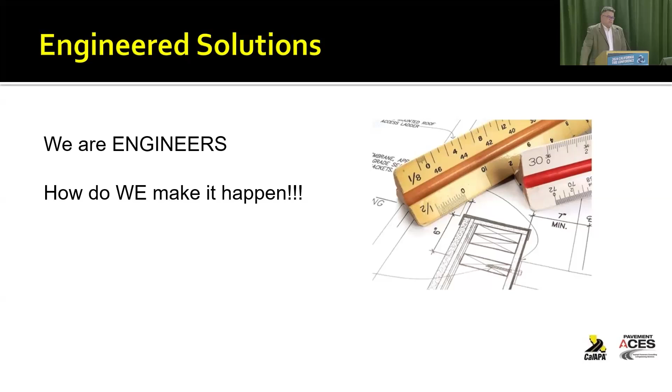And we know we can do this because, for many of us, we're engineers. We are provided an opportunity to fix something, and we figure out a way to do it. Utilizing recycled materials in asphalt pavements, we can do it and we can show it.

When we look at the state of California and the pavements that we're dealing with, we first look at our population. We look at the numbers of vehicles registered, how many drivers we have, how far and how long people are in their vehicles. They're pretty staggering when you compare this to the rest of the country.

That's a lot of people in cars driving our roads every day, and we have a lot of roads. Caltrans manages about 15,000 centerline miles, about 13% of all the roads in California, which comes out to about 52,000 lane miles.

But when you look at us as a state, we're just under 400,000 lane miles that we have to manage, maintain, and repair. That's number 2 in the country behind Texas, at about just under 700,000 lane miles. Then you have a state like Hawaii, with just under 10,000 lane miles.

So you can see that in California, we've got a lot of what we in the asphalt industry like to call opportunities in front of us.

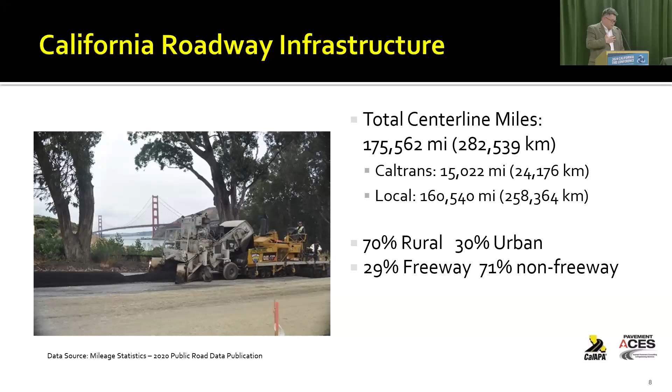When we look at our industry, we do a lot of work to help build, maintain, and reconstruct our pavements. A lot of tons of mix go down in this state, and probably half of that is private work, the other half public. Caltrans is 52,000 lane miles, cities about 181,000 lane miles, and counties about 150,000 lane miles, more or less. All that private work is maybe residential, parking lots, that type of paving. So that gives you an idea of what we're dealing with here in California.

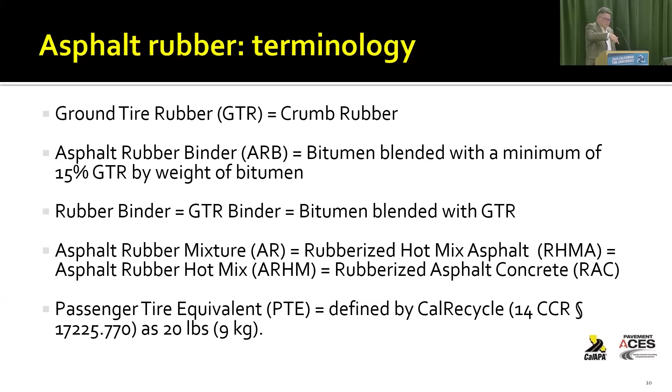With terminology, everyone calls it something different depending on the city, state, or country. But in general we coalesce around some concepts regarding asphalt rubber. We talk about having a minimum of 15% ground tire rubber in the mixture, 15% in the binder, which is in the mix. We also have other types of rubber binders and rubber additives that we deal with.

So how do we deal with it? We look at how to improve our pavements and take advantage of the rubber particles to help improve the materials we're using. We see that in our mix designs, our pavement designs, how we actually build it. We have to make some tweaks on all of that, but the key thing is that we're able to maximize the use of those ground tire rubber particles and take full advantage of their performance benefits.

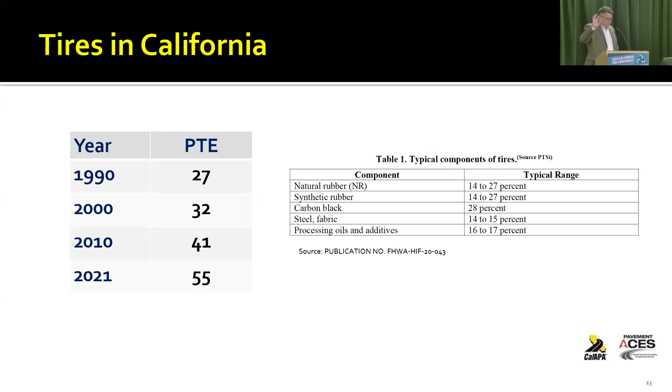Overall, we have a lot of tires here in California that we have to deal with, and it's been growing year by year. Why are we doing this with tires? Back in the 90s, we had huge stockpiles of tires in this state, and they would catch fire. We had 3 major fires in the 90s.

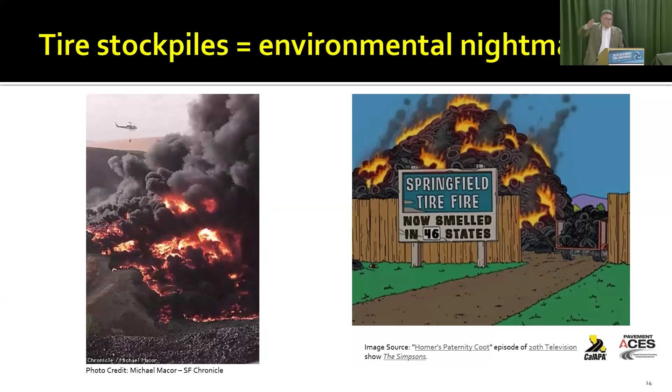What we don't often talk about is this - we've been talking about the coho, but this was a big one. Anyone who lived in California remembers the black smoke coming out of these stockpile fires, and they wouldn't go away. This is one of those art-imitates-life situations, where you had regular occurrences on our favorite cartoon show, The Simpsons, referencing the burning stockpile. This was a running gag that went on for a good decade in those shows.

We had to do something about it. That's really where we start to look at the commitment by our owners, by the agencies, regarding how we're going to manage these tires. How are we going to get rid of them? What other ways do we have?

It led to 2 ways that our owners in this state committed to use tires. One was through a straight mandate, where the legislature said Caltrans, you will use ground tire rubber in your pavements. We also had CalRecycle, who came in with more of a carrot-in-front-of-local-agencies approach to use it. As a result, we've seen a significant increase in rubber. That doesn't mean there's not a lot of space to grow, but we have seen this steady increase in rubber usage.

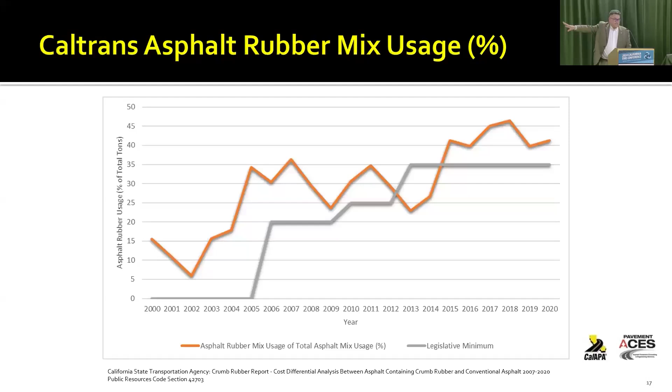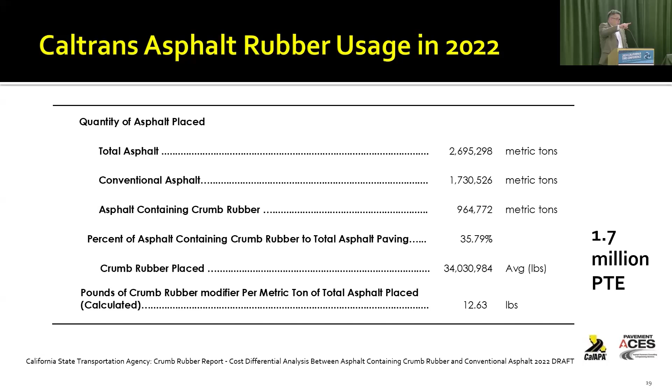Here's for California - we start to see the actual comparison of asphalt rubber to conventional mix usage. I'm moving through these slides fast, but you can download them off the website, so please do that. This just gives you an idea - we're talking about 1.7 million passenger tire equivalents that Caltrans used just in '22 alone.

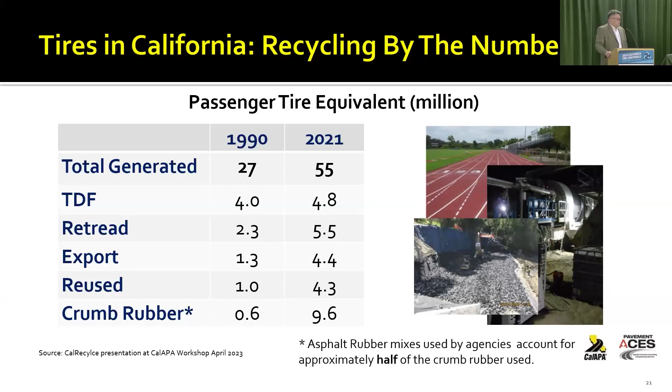And then also with the CalRecycle grant program, we're seeing another 2.6 million passenger tire equivalents that are being used each year because of their grant program. But that doesn't account for all of the other possible uses of it within our public works. So we're starting to see more increase in how we use it in our public works infrastructure projects.

So how do we do it? Why do we do it? It's because of the performance. That's really what it comes down to. This material started back in the 60s and 70s and has moved over to the present time where we have seen its use. It's been placed around on the streets in Southern California, in Arizona, all across the country. And the common thing that comes out of all of this is we're seeing something better than when we didn't have it in there.

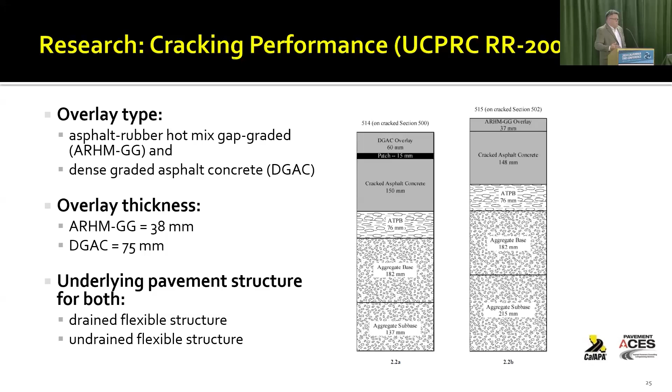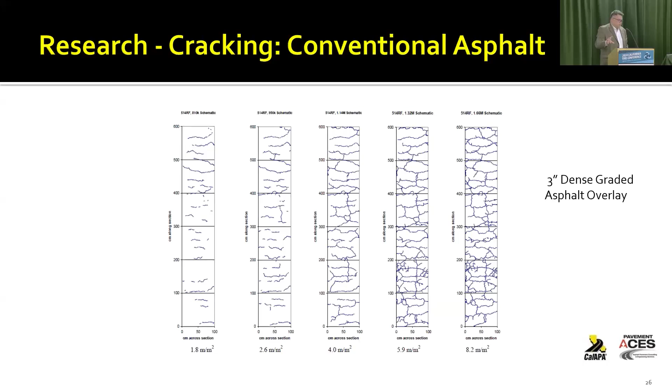Great research has come out from the UC Pavement Research Center. We have our director for the UCPRC, John Harvey, sitting right over there, going way back to 2000. Remember, we're talking about just after the fires, where we start looking at the performance of asphalt rubber compared to conventional mixes. We look at heavy vehicle simulator testing at the test track at UCPRC, where we see the cracking pattern for our conventional mix. Then we take asphalt rubber and do it at only half the thickness, and it's actually even at half the thickness, better than conventional mix at a full thickness.

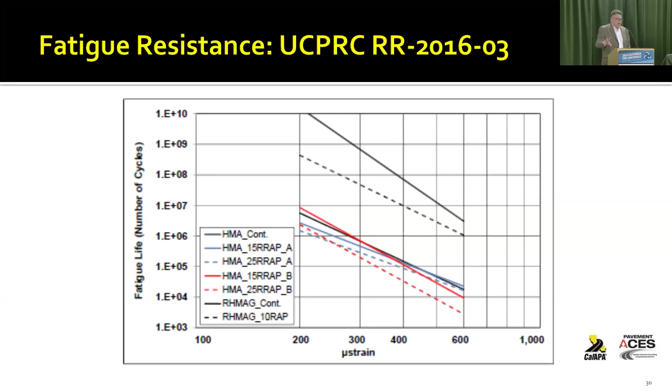So we're starting to not just see it in the field, we're now at a point where our research is starting to quantify it — quantifying the improvement to crack resistance of these mixes. We see it in more performance testing that we're moving to in our industry, for fatigue resistance, how it's much better than what we would typically see with the conventional mix. And when we're talking fatigue, this is about cracking — where the pavement isn't cracking, or is taking longer to start cracking progression to failure.

So continuing with research, Angel's going to come up here in a little bit and he'll go into a lot more detail on it.

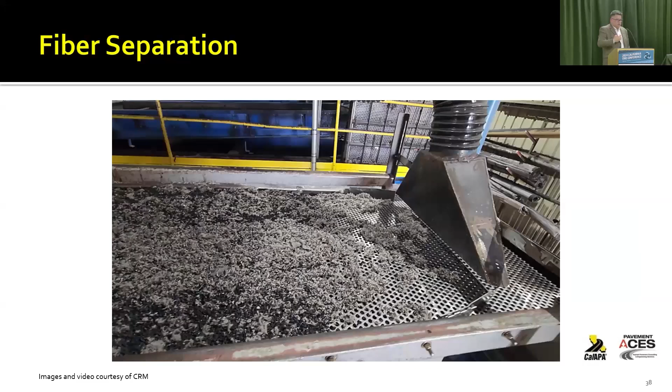Tire processing — how do we take this tire and make it into something we can use? Our friends here at CRM have done a great job in showing the industry and all of our agency partners how we do that: how we take a tire, grind it up, break it down into smaller parts, take out the metal, take out the fiber. We talked about that earlier in regards to the effects fiber can have on our pavements, or any recycling use in general. And then we go ahead and put it out into different sizes.

We have two primary processes, and when we talk about innovation in the asphalt rubber space, it's about looking at wet process innovation. We're currently using asphalt rubber where we take it really hot and mix the rubber in it. We also have something where it's terminal blended — this is where we start to look at the devulcanized rubber and utilize that to modify our binders and our mixes.

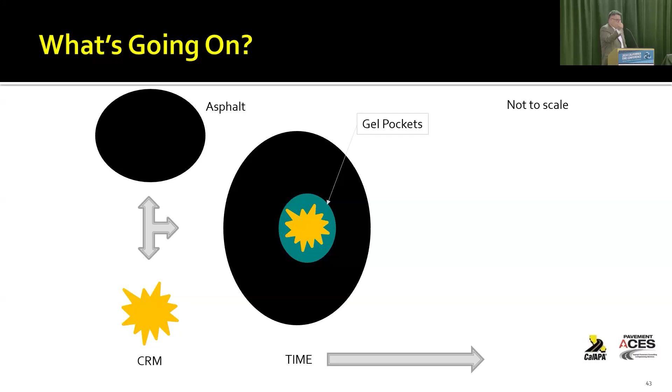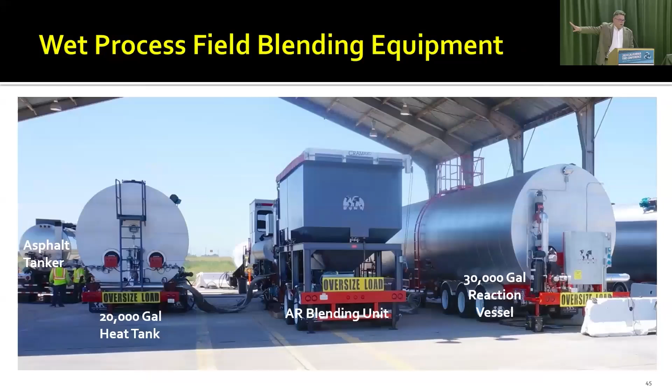So what are we actually doing? We're finding a way to make that rubber particle so that when we hold it, we can rub it in our fingers like a grain of sand. Doesn't feel like it can do it, but we can go ahead and, in our process, meld that with our asphalt to take advantage of its resilient properties. We do that in heavy equipment at hot plants where we're actually doing this on a regular basis during our mix production.

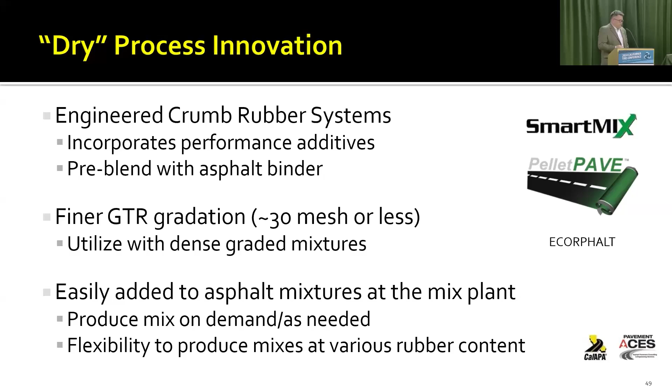We can take that binder that we've blended in the field, or maybe the binder that's been blended with the crumb rubber at a terminal, and add it to our mixes. So we have more and more new technologies on how to improve getting the crumb rubber into our mixes. We also have our dry process, where this allows us to have different types of rubber pellets that we can add at the plant. So this is where innovation comes in — it's not about whether it works, we know it works. It's about how we can economize and make it more efficient to get that crumb rubber into our mixes on an everyday basis. And then we evaluate it with our life cycle cost analysis, similar to what we saw with LCA for local agencies.

The City and County Pavement Improvement Center, which John Harvey directs, provides a lot of insight and training in regards to how agencies can use an LCCA, the procedure to evaluate the different types of strategies to maintain and reconstruct pavements and make sure that they're making the best decision for our public utilities.

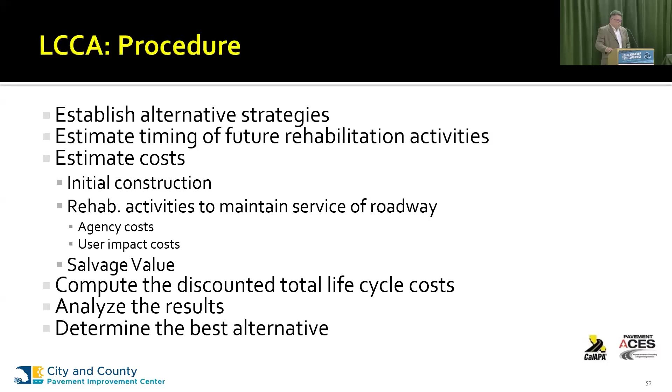Looking at the performance of the pavement, we take the performance information we have from our research and from our field, we utilize that to choose the best treatment for our roads. Then we can compare them and make sure this is cost effective. And that's one thing we definitely see with asphalt rubber is that when we do all of those calculations, we have a cost effective solution.

We have different available LCCA apps to do this type of evaluation, whether it's through CCPIC, the Pavement Preservation Center at Chico, Road Resource, or FHWA - all have great information on how to utilize these LCCAs.

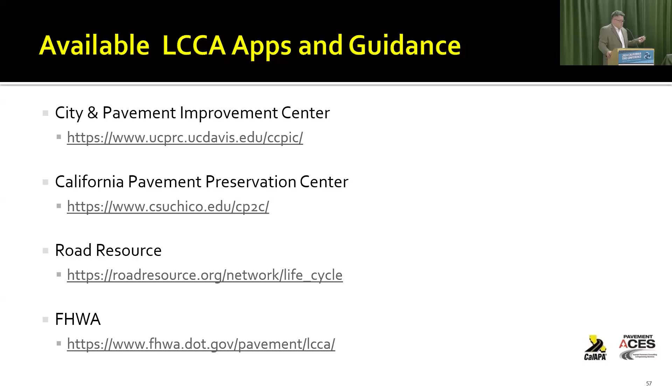So with that, I'm going to bring up Scott. He's going to talk about using pavement preservation treatments that incorporate ground tire rubber. Scott?

As we were preparing for this presentation, I looked at Brandon's 55 slides and I said, I'm going to have about 30 seconds. And he said, no, I'm going to blow right through that. And I said, well, okay, I'll find out when we get to the end. Congratulations, Brandon, you moved rapidly through that. I do want to say I appreciate it - I expected 4 people left in the room, 3 of them to check up on what I was doing, and one because they didn't know where they were and thought there was going to be dinner served. But I appreciate everybody staying. There's actually more of you than there is panel, which I was shocked by.

I'm going to start off where Brandon left off. One of the things that we look at in pavements all the time is pavement preservation versus rehab. What type of materials are we using? This is actually from the Road Resource website that Brandon mentioned.

It's just a comparison between 2 different approaches to treatments. Am I doing 2-inch mill and fills every 15 years, or am I doing something where I'm using products like an asphalt rubber cape seal in the middle of this after some slurry seal and some crack seal and other things? The idea here is to look at those life cycle costs over a 40-year road, 50-year road - how far can we push that out, how much can we save the owners? So this is the example with actual numbers to what Brandon talked about.

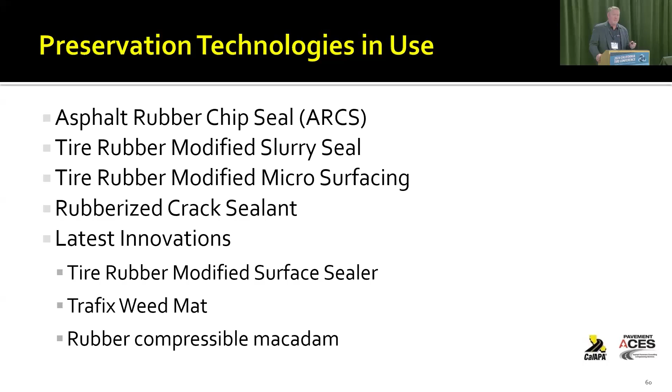Latest innovations - there's some new things out there. Tire rubber modified surface sealer, and then I've got a couple other really interesting new things I've heard about in the last couple of weeks. I just thought I'd throw that in as a way to think about how we can use more ground tire rubber in this state and how we can get more of it diverted from the landfills.

So with that thought process, I come back to Brandon's picture of the binder plant itself. We've got an asphalt tanker bringing in fresh AC from a refinery. It's going into a heated tank, going through that blending unit, and then we've got a reaction vessel. This is how we make rubberized binder, whether it's going into a hot mix asphalt facility or into a truck to be taken to an asphalt rubber chip seal job. And that's what I'm going to focus on here.

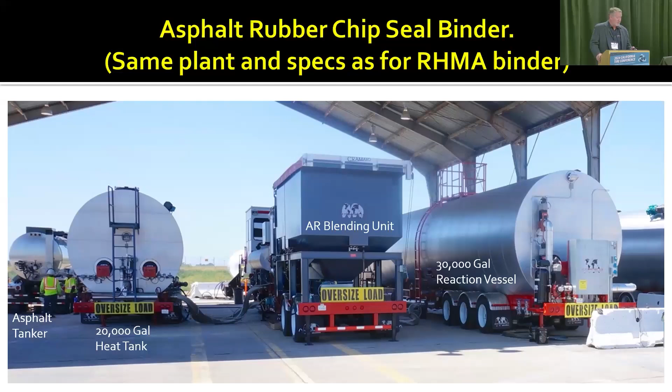So first of all, we pull that material out of those tanks. We put it into a blended tank, which has continuous movement in it because we cannot let that rubber settle. We take that out to the job site and put it in the spreader unit, which you see here.

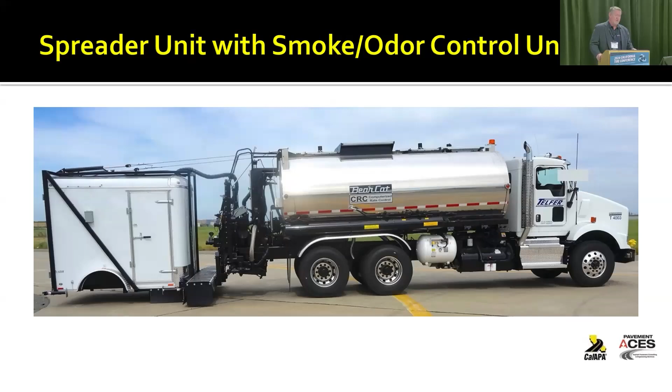Most of these have an odor control unit on the back of them. There's some way to draw those fumes in, and some way to take those fumes and filter them to get the particulate out of the air. The Air Resources Board has requirements on these jobs that you have to meet as you're spraying, because this material is typically sprayed at a little bit of a higher temperature.

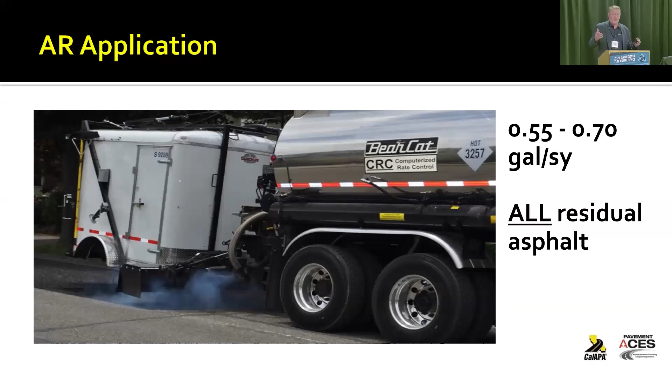So this is what the application looks like when it's going down. We're spraying a hot applied binder here, and we're putting down 55 to 7/10 of a gallon per square yard. You go, okay, what's that mean to us overall? I'm going to get to that really shortly.

How many tires is that getting off our roads? That comes down to the question. And what's the benefit? First of all, these AR cape seals, AR chip seals, we've got them lasting anywhere from 10 years to 15 years. I've seen some that are lasting 18 to 20 years out there. Now, should they have another treatment on top of them? Yeah, they should at some point.

Who here's from Caltrans? See, they're all over at Tom Pyle's retirement. Brandon and I went over there at lunch. 39 years, he's retiring. He's the guy we've been saying, why aren't we doing more asphalt rubber chip seals, Tom? He just decided to retire instead of answer the question. I don't know what's going on there.

Cities and counties, however, in calendar year 2023, used 12 to 15 million square yards of asphalt rubber chip seal, which is 40,000 tons of binder. As Brandon said, Caltrans only owns 12% of the roads. The cities and counties own the rest, and they've got to find a way to maintain them at an economical perspective.

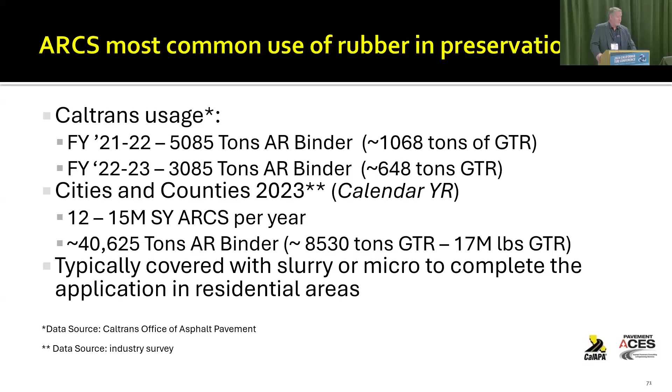And typically we cover that with a slurry or micro. Now let's talk a little bit about slurry and micro. A couple of years ago, and probably 10 - because the more I looked around that retirement seminar today, I realized he'd been there for 39 years. My wife's been with Caltrans for 38 years. And if they're that old, I'm probably forgetting how long I've been around.

So bottom line is, 10, 12 years ago we did some terminal blended materials down through Central California. It was a material manufactured by a producer that left the state, unfortunately. We're not really using a lot of ground tire rubber in slurries and micros anymore, unfortunately. There's a couple little spot pockets down in the San Diego area where they're putting a little dry powderized rubber into the hoppers on the back of the trucks. And there's a little bit more where there's a local plant that manufactures and sells to local cities who apply it themselves. This is an area that I think we could improve in this state.

I think about the innovations that are coming, some of the materials being developed by manufacturers and new products folks here. This is an area where we could expand our use of rubber by helping.

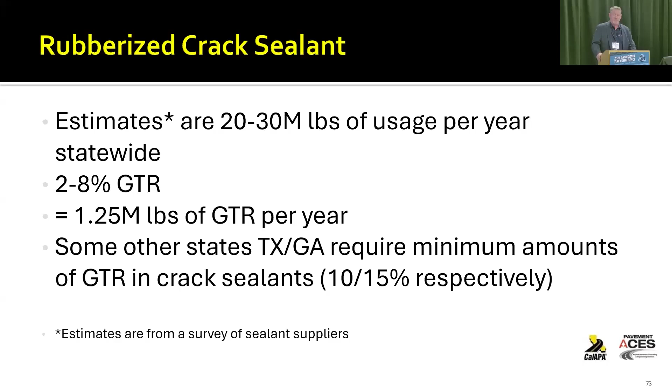The rubberized crack sealant I talked about earlier, 2 to 8%, really we're meeting a performance specification here. So if they don't have to put in filler, they don't. There are other states, Georgia, Texas for example, requiring 10 to 15% in their crack sealants. I've heard of one requiring 20% ground tire rubber to make sure it's being used in that state, and they can still get the same performance requirements out of it.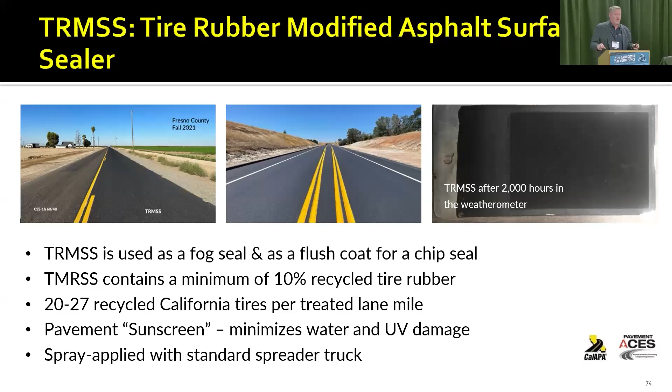And then there was this one. It kind of blew my mind, but it's really interesting. Taking a wide crack, putting down a little layer of sealant at the bottom, filling it with ground tire rubber, and then sealing the top with another type of polymer. So basically, every time that concrete moves, the filler in the middle is like a rubberized sand. It just moves with it, expands and contracts. Instead of putting a crack sealant down that's adhered to both sides and pops off of one or pulls off the other, this moves with it.

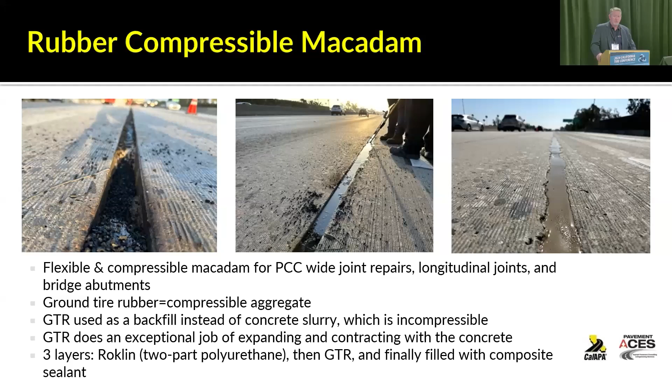I thought these were interesting, innovative technologies we're using in pavement preservation. I think we could do a lot more. I would urge CalRecycle to look at the new technologies out there and maybe open up opportunities for some of these companies that started in another state, but have new technologies we could use in our pavement preservation tools and techniques that we're trying to put in the roadways. And that's all I got. Thank you.

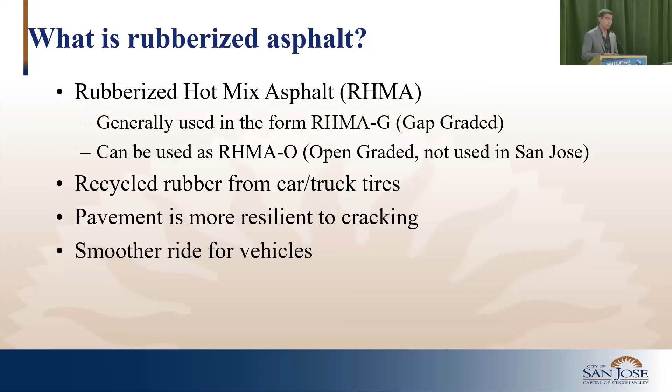If we were to get into the details of the mix design of this product, it's a combination of virgin asphalt binder, crumb rubber, and asphalt modifiers. On the CRM, it's mainly 75% from scrap tires from passenger cars and 25% high natural from truck tires.

How do we do the mix design for these RHMA-G or RHMA roads? The current practice is the standard specification using the superpave mix design. Our specification, we design these in the lab for 4% air voids using the gyratory compactor, and the gradation is gap gradation. With the current process, which is the wet process, the crumb rubber is visible, it's not dissolved, you can still see chunks of rubber, so you need to accommodate that with the mix design. That's why we use gap gradation to accommodate that.

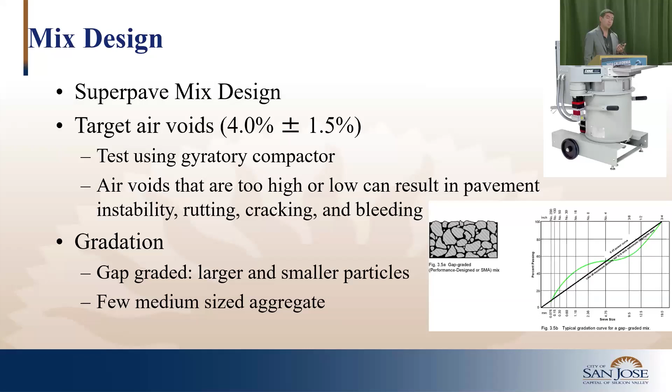Now what's a typical mix design look like? This is an example just to give you an idea of the details of the mix design. We typically use it in a 2-inch thickness on our overlays. We currently don't have any RAP, and I think that's pretty much statewide - we don't use recycled asphalt pavements in RHMA.

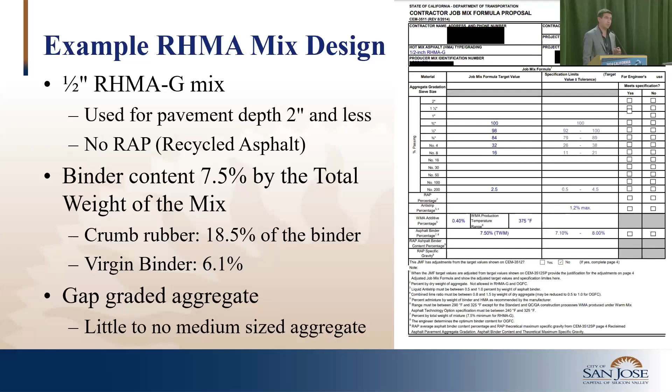The binder content - we have a minimum binder content on this mix of 7.5 by total weight of the mix. If you just do the math, which I've done to simplify it for you, the virgin binder portion of the RHMA-G is 6.1. Keep that number in mind, because I want to compare that to the HMA mixes that we also do. As I said, the gradation is gap gradation, but we have a significantly higher virgin binder that we're able to use with these mixes because of the rubberized component.

This is a typical mix design that we get on our conventional HMA. HMA is used everywhere in the nation and also widely used everywhere else. Same mix, half-inch mix. We allow for up to 15% RAP currently in our HMA mixes. The typical binder content is 5.1. In this example - and this is just for one job - usually it ranges from 5.1 to 5.25. I haven't seen anything higher than that.

As a comparison to the RHMA, we're talking 1% higher virgin binder. For the pavement engineers in the room, if you're able to increase that binder content on the film thickness around your aggregates, that's where your durability comes in, and that's why you'd get better longer-term performance out of your pavements.

Now, how do we use these two products as tools in our toolbox? We mainly focus using RHMA on major arterials and collectors. A third of our network - which is 4,300 lane miles of streets - is arterials and collectors. These are the streets that carry most of 87% of our traffic. Think of higher traffic, a lot of buses, a lot of trucks that travel. So we use RHMA on those type of roads.

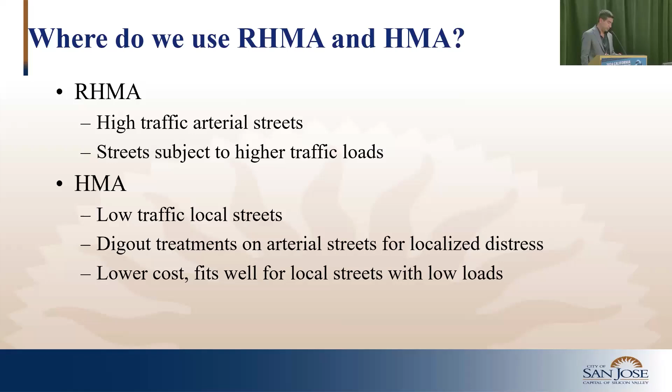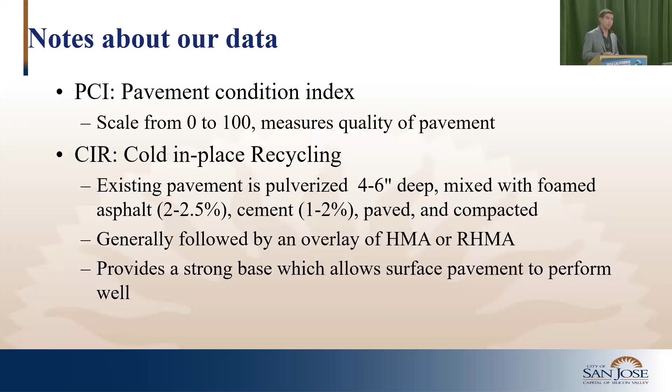You mobilize this machine, or recycling train, where you're able to recycle that material in place and open it to traffic at the end of the construction, or at the end of the day.

For the long-term performance of these treatments, we wanted to make sure we were comparing everything equally to each other. So we looked at our mill and fill practice as well as CIR and overlay—mill and fill with HMA, mill and fill with RHMA, and then CIR with HMA and CIR with RHMA.

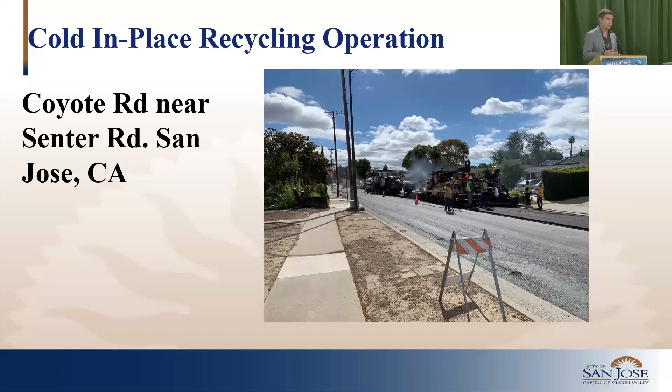For those who haven't seen a CIR operation—it's a train. You have multiple machinery you need to mobilize. It still looks like a paving operation because the last machine is a paver. After the material gets pulverized in place, it gets dumped inside the paver hopper and put in place, with the same type of effort for compacting it. This is a typical CIR operation we had on Coyote Road near Senter Road.

Now let's look at some pictures and field data. I'm showing the RHMA field performance for the sake of this presentation, but all the streets I'm showing here are major arterials—they carry heavy traffic index of 10 and above.

This is a picture of Mabury Road. It was last paved with RHMA in 2010, so it's been a little over 14 years now. The treatment back then was a mill and fill job with 2-inch mill and 2-inch fill. The current PCI, as of 2023, from the inspection using the automated machine our consultant uses—which takes videos and pictures of the road and has a laser in the back that analyzes everything into that aggregated PCI index I mentioned—is 73. So think about that performance over 14 years; that's pretty good.

And the picture speaks for itself—that speaks a thousand words, right? We don't really have a lot of load-related cracks at all. We have mainly little damage, mostly oxidative block cracks. As a reminder, we don't design pavements to last forever; the typical design life is 20 years. Oxidative aging happens from the environment because of sun exposure, and in San Jose we have over 300 days of sunshine.

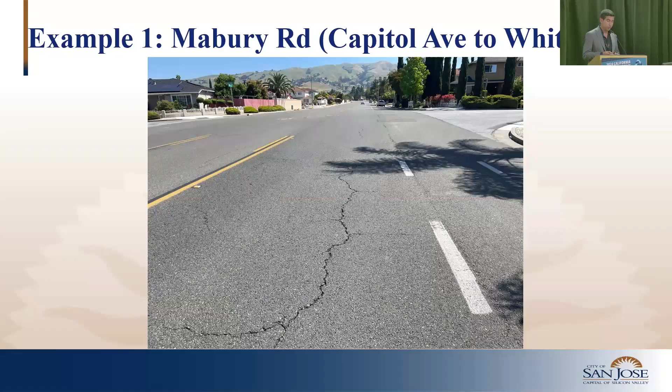So we're pretty happy. Some more pictures of how the pavement looks like. As you can see, these cracks are not on the wheel path or anything. It's mainly oxidative aging cracks.

Another road that we also looked at was White Road. This one was also paved in 2010, the mill and fill. The PCI on this one was a little lower, so the current PCI is 61. Traffic-wise, I would say both of these roads carry the same amount of traffic. We are planning to seal this as a pavement preservation this year, actually, as we speak.

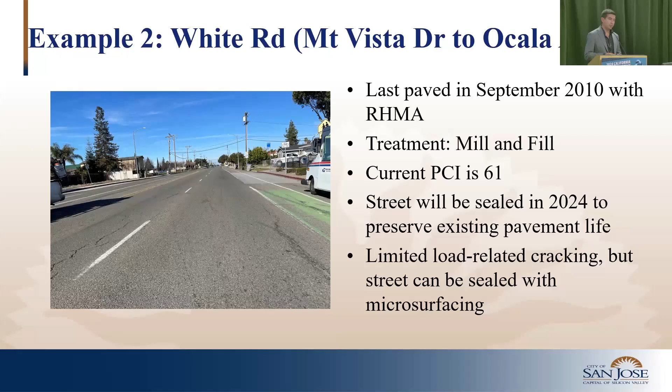Again, on this one, same thing, limit load-related. So we had some load-related cracks on this road, and also same oxidative aging. So this is a typical picture that we got in the field on this one. As you can see, some load-related cracks underneath the wheel path.

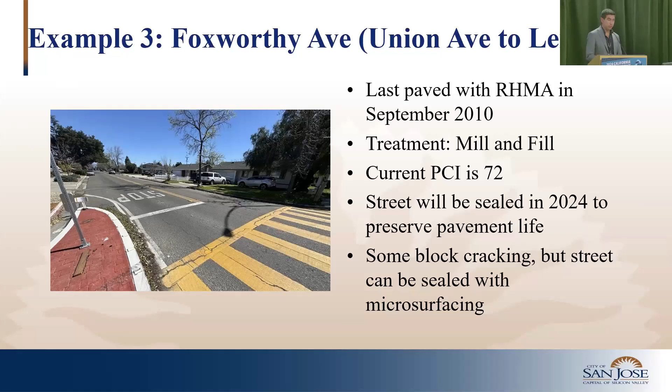Foxworthy, that's another street that was in a pretty bad shape when we did this back in 2010. The current PCI is 72, and some pictures of that. As you can see on this one, we have a longitudinal joint and some block cracks. The longitudinal joint is something that's definitely related to construction, and the contractor not being able to compact that joint very properly.

Poughkeepsie. So now switching gears, the streets that you saw up to now were all mill and fill jobs. Now let's look at some of these, the combination of CIR and HMA, or in this case, CIR and RHMA.

So this street was done in 2012. We did cold-in-place recycling with foamed asphalt with, I think, 4 inches - I have to check, it was either 4 or 6 inches - but we capped it with 2 inches of rubber, a thin overlay on top. Now the current PCI on this street, as of an inspection that we did last year, is 92.

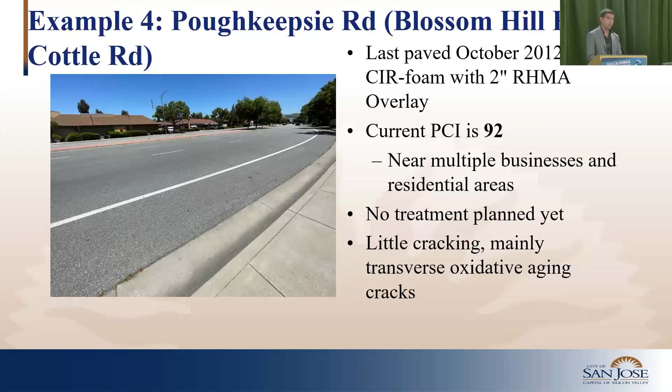So this was very surprising to us because we were really pleasantly surprised that it is holding up very well. Again, it has high traffic. We saw little to no cracking, mainly transverse type of oxidative, aging cracking. Keep in mind, this street was built a little later than the other two.

Again, very high traffic. It was lastly paved in 2011 with the same strategy, with CIR and RHMA on top. Current PCI is 80. Again, the traffic is definitely a lot higher than the other street that I was showing you, but still, we're very happy with the field performance.

Again, due to the... as you can see, the longitudinal joint is still a problem there, and after these many years, 13 years, we are seeing that longitudinal joint opening up a little bit further, but still very good quality. Some oxidative edge cracking, but still in pretty good shape. And some more pictures of that.

Now, going back to the CIR and RHMA, we believe that the difference we are seeing in the results in the field, the better performance that we have with the combination of the two, definitely has to do with the base. So if you are able to provide a solid base underneath these overlays, you can definitely extend that life even further and make sure that your pavements stay smoother for a longer time.

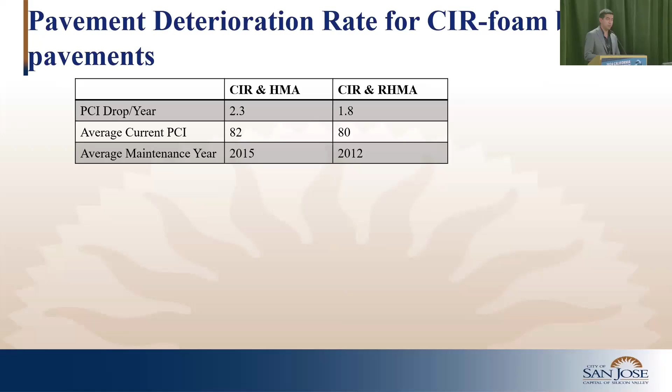Now, if you remember, I talked about that increase in prices we saw recently this year, in 2024, from our bids. We wanted to do a deeper dive, and we surveyed some of our local producers that make both HMA and RHMA, because we thought maybe the cost of material had increased that much to cause the 35% increase. We actually found out that's not the case.

As you can see in these numbers, these are typical numbers we received from some of the suppliers that we were able to average out. Cost of rocks and aggregates is pretty much similar between RHMA and HMA. RHMA is a little bit higher because of that gap gradation they have to meet. So $55 per ton versus $65.

Asphalt binder price - asphalt binder is the most expensive component. We use just 5 to 6%, but it's pretty expensive, as you can see. The price is correlated to the price of crude oil, at $477 in both cases. In the HMA case, we only use 5.1%, and in RHMA, because of that gap gradation, we have to use higher binder content, which also gives us good durability - 6.1%.

CRM, or crumb rubber, that cost is also there. It's only 1.1% of total weight of your mix in the RHMA. You don't have that cost for your HMA, but you also have the RAP cost for HMA mixes. Now overall, the price is $92 per ton versus $75 or $76.

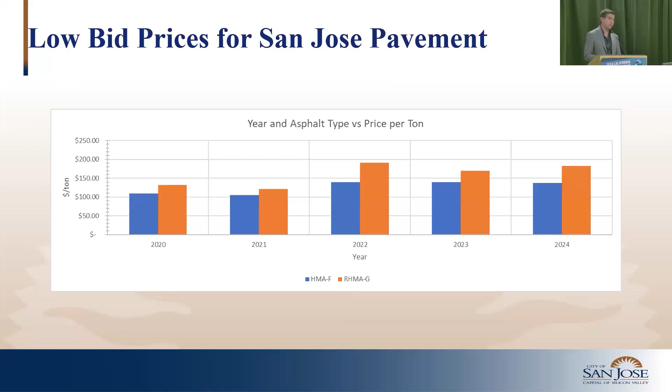Now let's look at some of the recent numbers we saw. Going back to 2020, as you can see in this graph, that's where everything was a lot cheaper. We were able to do a lot of projects at reduced cost because of the favorable economic conditions back then. But throughout time, things have increased, and as you see, the gap is increasing quite a bit, at least for our area.

We also wanted to look at the crude oil prices and make sure we weren't missing anything there. The highest price we've seen - this is an index that Caltrans publishes and monitors. As you all remember, 2020 is when oil went negative, so that was the lowest price we also saw for asphalt prices. The highest we've seen was from 2 years ago - it was 646.

The price has stabilized, but what we're able to conclude is our increase in cost is mainly driven by the contractors. The contractors are giving us a bit more increases in prices on RHMA, and most of them are still inexperienced. So we're still trying to wrap our heads around that, because we want to use RHMA, but that increase in cost is affecting our ability to do more roads.

Now, in conclusion, we definitely saw the improvement between CIR and non-CIR treatment in both HMA and RHMA, but with RHMA we also saw an increase in durability because of that rubberized material. We also believe, in San Jose, having done CIR for a long time, that providing a homogeneous platform underneath overlays, whether for private or public roads, is very important.

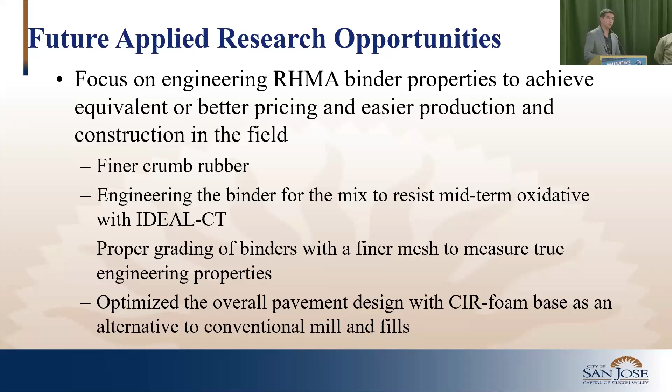Now with that, I'll conclude my presentation. Thank you.

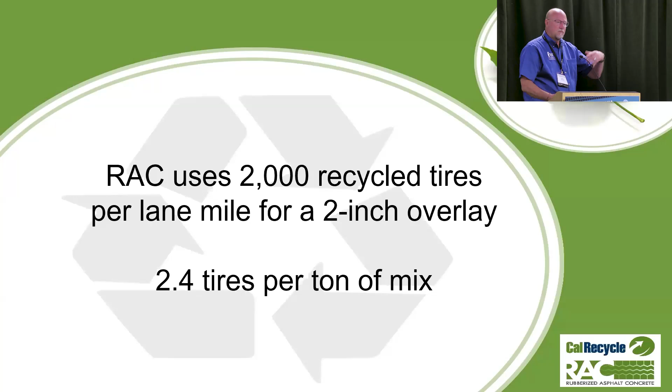Looking at the market in California with asphalt rubber, the LA area is pretty well established, but the rest of the state doesn't have a lot of asphalt rubber use in rural areas. Part of that is the mobilization cost of that blender unit. Also, rural areas may not have a lot of budget for a project, so you get a smaller tonnage job of asphalt rubber. So the thought here was, is there technology out there that can alleviate that mobilization of the blender unit? And there are.

These new technologies, currently not made in California, pre-blend the crumb rubber and liquid asphalt at a refinery or somewhere else. They're then shipped to the hot plant cold and introduced into the hot mix as it's being made. The claim is that the performance will be equivalent, so CalRecycle wants to study that.

So they partnered with Stanislaus County, which currently has an awarded project that will be under construction in the coming weeks. It's 3 miles long, using 6 different products in the overlay, 4 of which are rubber. We have a section that is the traditional asphalt rubber hot mix with the mobilized blender unit, and 3 test sections that have pre-blended products: SmartMIX, PelletPAVE, and Ecorphalt. These are going to be placed this summer.

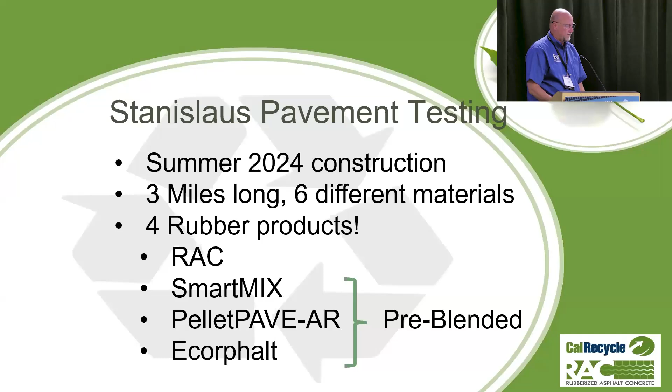CalRecycle provided $715,000 to Stanislaus County to do this test project and also document the test and monitor this section over time. CalRecycle solicited letters of interest, received several of them, and Stanislaus County was selected.

These test sections will be compared to a conventional asphalt as well, so side by side we'll be able to monitor pavement performance over time. We're going to document this material and do wide outreach so that transparently everyone can see the performance of this project. There'll be some interim announcements, probably documenting how it's placed and things like that.

On our team we have the Prime, which is Nichols Consulting Engineers, Mike Robinson, a well-known pavement expert, and then the Inner West staff. Together we did pre-overlay evaluations of the pavement and the design of the overlay, and we're going to be conducting the field observations for that long-term documentation.

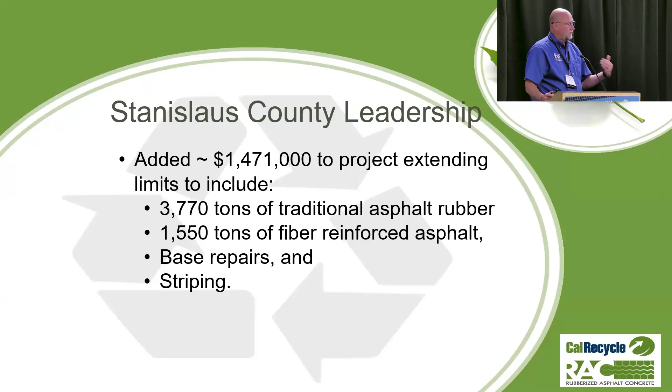Stanislaus County stepped up in a leadership role too and grew the size of the project. They added $1.4 million of local funds to extend the project limits to try to capture an economy of scale. So there are 3,700 tons of traditional asphalt rubber field blended, and 1,500 tons of a product called fiber reinforced asphalt, where little fibers get pushed into the mix and help interrupt the stresses there. The county is paying for the base repairs and the final striping.

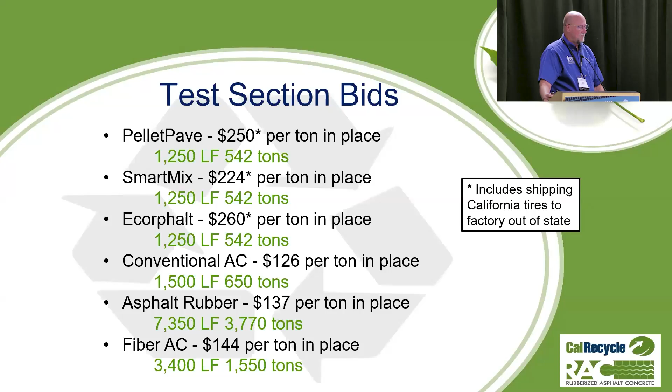The Pellet Pave was $250 per ton, placing 542 tons. Smart Mix, $224 a ton, same tonnage amount. And the Ecorphalt, $260 a ton for the 542. Now the conventional test section is 650 tons, and that came in at $126, so there's a big delta there. The traditional asphalt rubber hot mix came in at $137 a ton for a larger quantity, 3,700 tons placed, and the fiber came in at about $144.

We also asked in the bid, kind of what Frank went through, to open up what is the pricing for all the constituent materials that go into that per ton bid. So we got costs for the mix design, mobilization, aggregate, binder, producing the material, and then the mix haul and placement. So we have all that data as well.

So with that, I'm going to turn it over to James Signori to kind of take us to the next steps that we're going to go through.

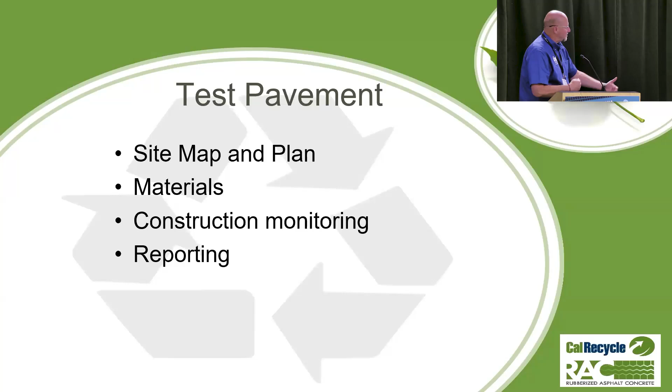Hi everybody, my name is James Signori with NCE. I'm basically going to tell you about the same things that Theron has already said, but maybe with just a little bit of a different angle.

When I think back about the last 10 years of being a pavement consultant here in California, I've probably talked to 100, 150 different agencies. And I tend to get maybe 4 different spins when I talk to people. One is, I love rubber, I want to continue using it. The other is, I hate it, I will never use it. And that's primarily because they had one bad experience at an agency 20 years ago, something like that, and they're tough. And then you've got the person that's never even heard of it, so you get the chance to educate. And then the fourth one is, I'm willing to listen.

I'd like to thank CalRecycle and the county for giving us the chance to build this test track, because no matter how much evidence I've got, I could pull out Professor Harvey's studies, show them all sorts of things about how well these pavements can perform. But if someone has had a bad experience, or if they're a little uncertain, or if they're nervous, or if they're risk averse, what have you, they don't want to try anything new, sometimes they have to experience it themselves. And I think seeing this test pavement in action, we're going to invite lots of people to check it out during construction and then following construction.

So the basic steps: site map and plan, we'll talk about some of the materials, monitoring and so forth. So here's where it is. It's down in Keyes, California, just north of Turlock. As Theron was saying, it's a 3-mile section with 6 different asphalt pavements.

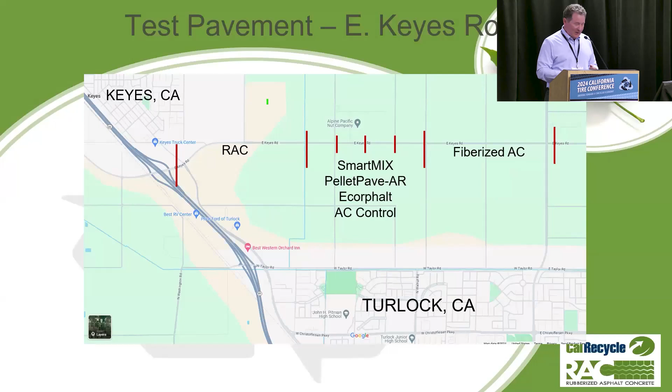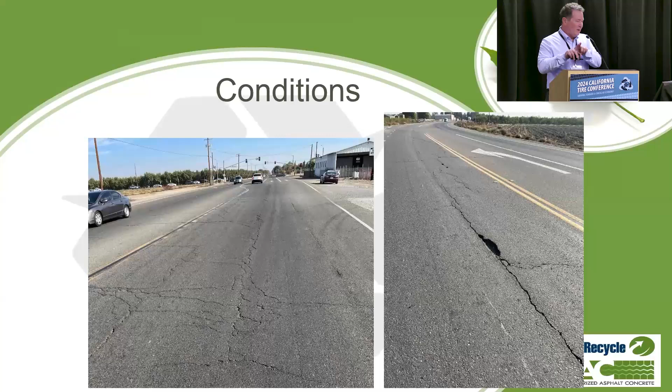This is a high traffic, heavy traffic corridor. Let me show you some pictures to give you a feel for what it looks like. You can see that pretty extensive cracking throughout, a lot of cracking between the various lanes or where the adjacent pulls of asphalt happened. Heavy truck traffic - this is a farming area, especially in the farming season.

One of the goals of this project is to build it before the season, before they start hauling the fruit and vegetables. We had to get in there, and the goal is to get it built ahead of time.

One of the toughest days I could remember was being out there with about 6 cans of paint, marking the base repairs, dodging 60-mile-an-hour traffic. And the point is, while the sections are reasonably even, the goal was - we didn't have a huge budget - to literally try to make them all the same.

This isn't a pure research study as such. We didn't have that ability to make every section equal, but through marking the repairs and fixing the cracked sections, we wanted to at least be able to make them semi-equivalent. And so the contractor's first step is to go out there and fix the pavement.

We're going to document a lot of this ahead of time. Chico State is coming to fly drones to document the condition before the pavement is repaired, after it's been repaired with patching, and we'll get some work done during and after. Professor Harvey may have some folks come and sample. We haven't figured it all out yet, it's still happening, but it's really exciting. I can't wait to get this started.

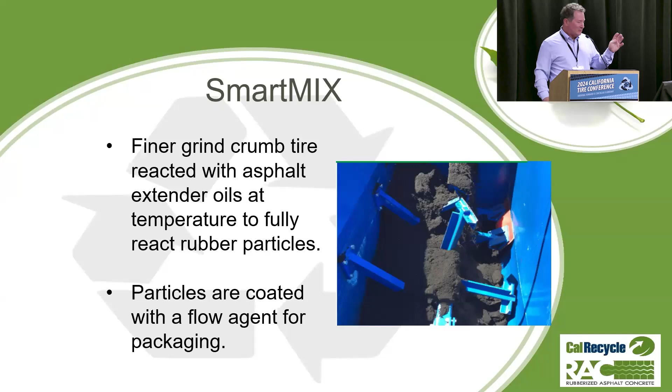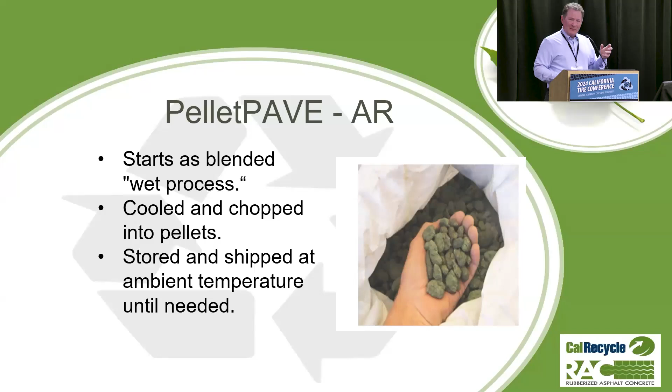The idea is that because it's difficult to get the wet process technology into more remote areas, we're looking at ways to bring this material to more remote areas or even local agencies that just want to try it.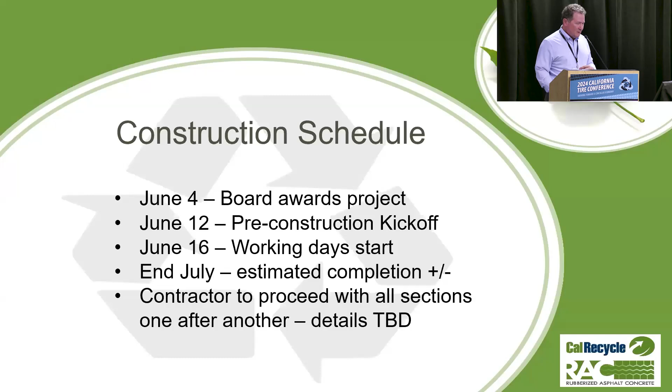So the schedule is as follows: the board's already approved it, construction's kicked off, and the working days have started. So the countdown begins. Right now the contractor is doing the mix designs, and over the next 6, 7, 8 weeks we'll get construction completed, probably end of July, early August. So don't be surprised if you start hearing about this project—we're going to publicize it, and the details will be determined.

As far as construction monitoring, the idea is using drones and field surveys so we know what's out there. We're not doing an official tracking of condition over time—it's not a hardcore research study—but I think we'll be able to show these materials work. We're not trying to prove one works better than another or do any ranking. We're trying to show basically yes or no: can we use these materials, how viable are they? I think this experiment should go a long way.

We'll be doing a lot of observation during construction, inspection, and testing of each of the materials, with a lot of documentation. Part of this is we want to end up with a report that is justifiable and defensible, showing these materials worked as such. Once we get that unbiased report, we'll present it and be in good shape.

So anyway, stay tuned for this—you'll probably start seeing it in the next few weeks as construction begins.

While we're talking about that, a little bit on other work CalRecycle is doing with asphalt and pavements: we're looking at updating the Rubberized grant program. Theron mentioned earlier the difference in cost between rubber in Southern Cal and Northern California—that was based on a study he did a number of years ago. We're now updating those numbers with data up to and including 2023, 2024, and that should be done in the next couple months.

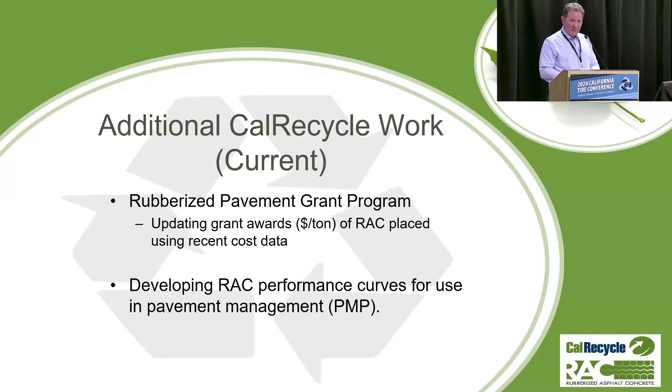Steve Krause with CRM. I had a couple of questions. The first is more of a statement. The premise behind the pellet project is trying to utilize the pellet material in so-called rural areas. But asphalt rubber is being used all over the state, including Eureka, Fortuna, upstate Northern California, as well as areas out Redding, and eastern areas like Alturas and Burney. So asphalt rubber is frequently used all over the state, and I want to make sure people understand that.

One of the other questions I had is typically CalRecycle, for most projects they incentivize or provide grants for, requires that it's California tires processed and manufactured, the crumb rubber processed and manufactured in California. This particular contract, I believe, deviates from that requirement—that's the requirement of the grant program, the RAC program, the TIP program, the tire derived product program. But this contract is a little different, where it requires California, the use of California tires. So my question would be, what documentation or process did you use to ensure the chain of custody that California tires were in fact used to produce these materials, shipped back to California and utilized for this project?

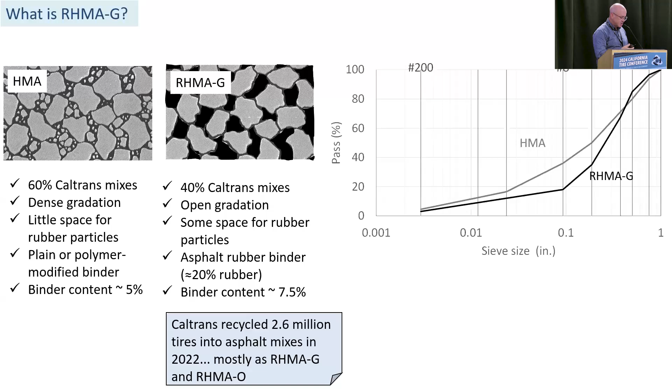The next question is, why do we need RHMAG? My previous presenters have done an excellent job showing that RHMAG is worth it and that the performance is very good. In this introduction, I'll just give you a few numbers. If I look at Caltrans' 2022 crumb rubber report, I see that RHMAG was, on average, 17% more expensive than HMA. Based on a previous presentation from Frank, it seems the difference is even higher at this moment.

So it's more expensive. If I look at greenhouse gas emissions, RHMAG is also higher than HMA. To produce one ton of RHMAG, you emit on the order of 35% more greenhouse gases than producing regular HMA. So the question is, why do we need RHMAG?

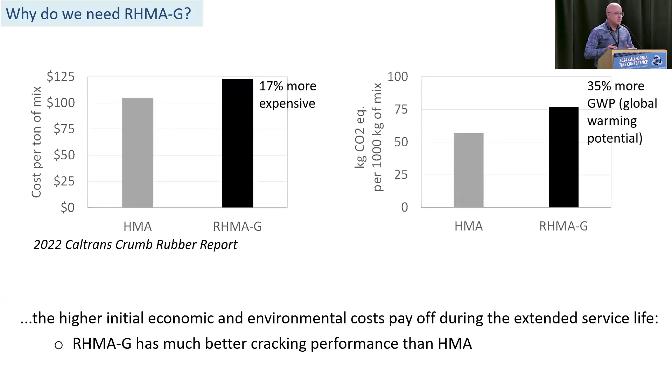As you've heard before, the performance of the RHMAG is much better than the performance of the HMA in many aspects: noise reduction, microsurface, microtexture, but cracking resistance is one of them. The cracking resistance of the RHMAG is way better than the cracking resistance of the regular HMA.

There is a cracking parameter becoming very popular called the CT index. It's basically measuring how much I can stretch my mix before failure.

These are some examples. On the left, in gray, samples for a number of mixes we've been testing during the last year, recent mixes. In black, a number of RHMAG mixes we've also been testing. The base binder is the same in all of them, more or less. But if you look at the CT index, which gives us an idea of the cracking resistance of the mix, it's so much higher in the RHMAG than in the HMA, much, much higher.

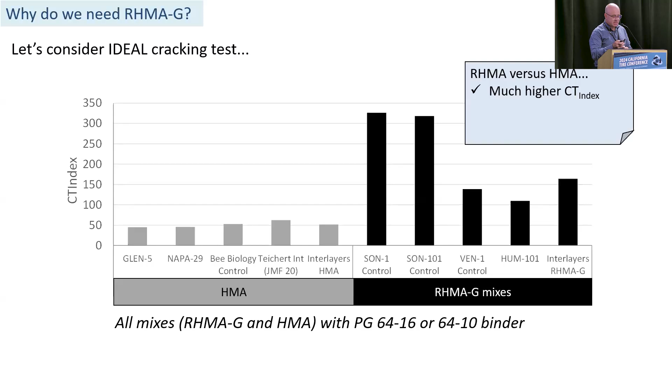The 4-point bending fatigue resistance test — I like this test very much because it has been shown to have a very strong correlation with the field. When we do designs with CalME, the tool we use for mechanistic empirical pavement design in California for Caltrans, this test is one of the main inputs to that software.

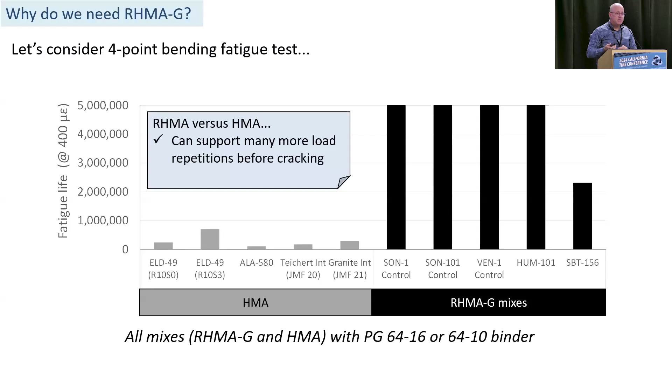There have been plenty of studies in the field and in the lab. Some of the initial studies was a reflective cracking evaluation with the heavy vehicle simulator that showed that in terms of reflective cracking, 1 inch of RHMAG is equivalent to 2 inches of regular HMA.

So again, my main message with this long introduction that has been 11 minutes is: when you compare HMA versus RHMAG, don't think like 1 ton versus 1 ton. That's not the fair comparison, okay? The RHMAG is going to perform much better than the HMA.

Now let's go to the background of this presentation, the reason why we started this study, the study that is use of RAP in RHMAG. At this moment, the Caltrans specifications do not allow the contractor to use RAP in the RHMAG mixes, okay? And that's something that happens in many countries when it comes to the surface layers.

So again, you use RHMAG in the surface, you expect that mix to have a very high fatigue performance. So the original idea is let's not add RAP, because we are scared of the RAP reducing the fatigue performance.

On the other side, the idea is, well, why not add RAP, right? What are the advantages of adding RAP to the RHMAG? There are two main advantages. One is the economy, okay, the material will be cheaper, and the other one is the environment. You are reducing the need for extracting new aggregates, you are recycling the old binder, and so on. So there are economic and environmental reasons to think about adding RAP to the RHMAG.

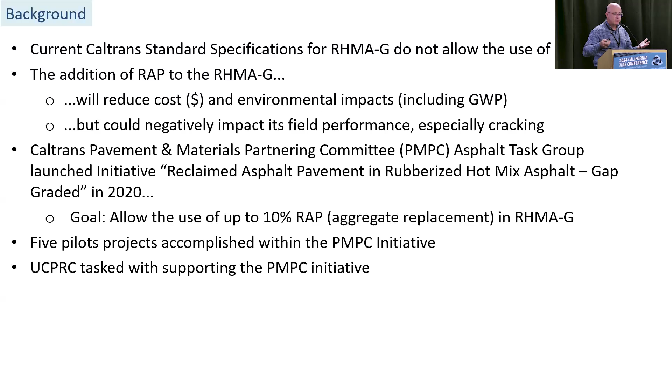But those are the pilot projects that we have evaluated. And what do we do in a pilot project? This is one example of one of the pilot projects. What you see there is the picture. There is this pilot project where I think it was like 10 miles or something like that, I don't remember exactly. But in all the pilot projects, this is about a mill and fill operation.

In almost all of the pilot project, the contractor used a regular RHMAG, that means an RHMAG that has no RAP. Then in a small section that was 0.4 miles, the contractor used an RHMAG with 10% RAP.

So what do we do? We go there, we monitor the construction to make sure that there is no problem with the compactability of the mixes, and then we sample the mixes, we bring them to the laboratory, and we do a very comprehensive laboratory evaluation. In addition to that, we monitor the performance of the pilot for at least 5 years.

That's the idea. We have finished the testing of the mixes, so we have the preliminary conclusions. Based on that conclusion, we were able to make a recommendation, but again, we still need to monitor the performance of this for at least 5 years to see that everything is going well.

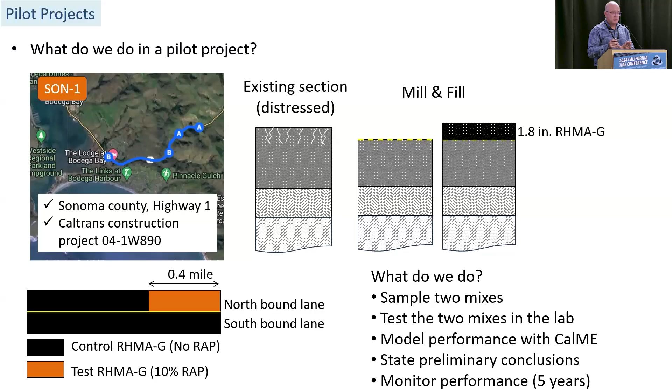I think now we still have relatively 5 minutes, right, Lito? Okay, so just one comment.

That's why in this project the amount of RAP that they added is 10%. It seems that the maximum amount of RAP would be in the order of 20%. It seems difficult that you could go beyond 20% RAP without making additional changes.

In this project, the contractor chose a relatively simple approach to add the RAP. They didn't change the mix design. What they basically did is, in order to add the RAP, tweak the percentages of the different bins during production to match the original gradation. So basically, they replicated the gradation of the control mix.

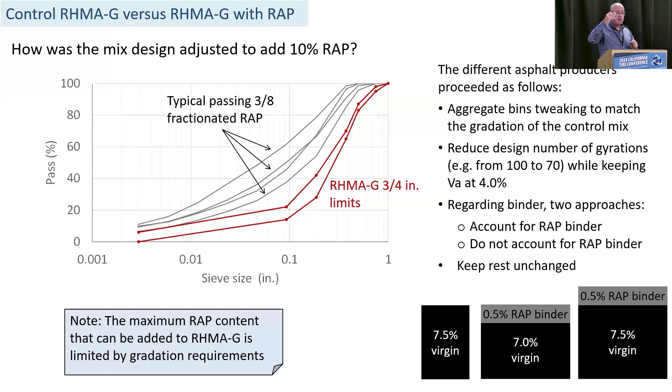We achieved the goal by answering four questions that I'm going to formulate now. I'll finish very quickly. First, how do the mechanical properties of the RHMAG change when we add the 10% RAP? That's the main question we want to see.

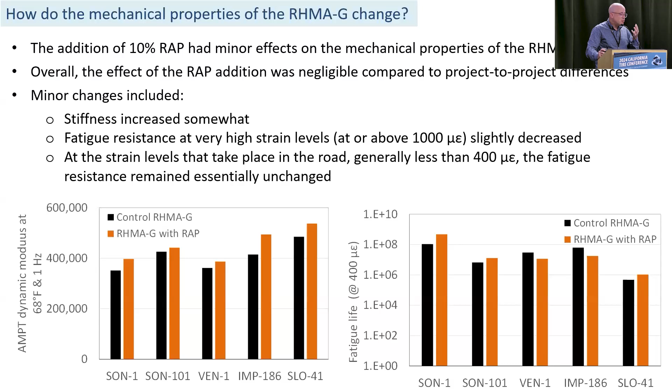The short answer is the change in the mechanical properties was negligible. Differences from one project to another were much bigger than the differences observed after adding the RAP. In some cases we saw a small drop in fatigue resistance, but in most cases there was no drop, or even an improvement. So from the mechanical properties point of view, we didn't see any problem with adding 10% RAP.

We did some modeling with CalME, the software used for mechanistic empirical pavement designs in California. We fitted CalME with the properties of the control mixes with no RAP, and then with the properties of the test mixes that had 10% RAP, and did pavement designs in different scenarios. The outcome was that it doesn't matter — we get the same thickness with both materials. So based on CalME modeling, the two materials are equivalent; there is no problem with adding 10% RAP to the RHMAG.

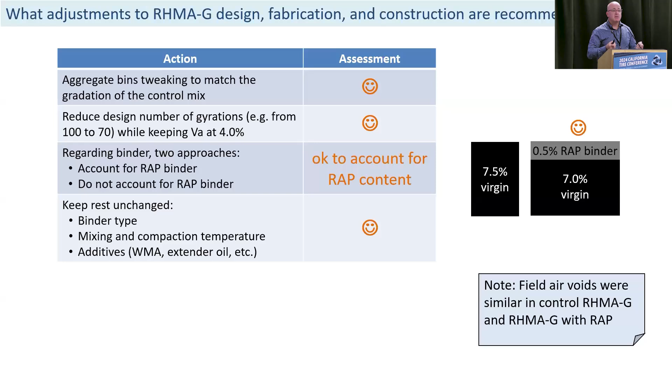We also evaluated the different approaches contractors used to add the 10% RAP, and we are very happy with the outcome. We believe the HMA producer followed the right approach to introduce the 10% RAP. Regarding the binder contribution to the minimum 7.5%, our conclusion was that there is no problem assuming the binder in the RAP contributes to that 7.5%. So basically, if the original mix has around 7.5% virgin binder, the mix with RAP will have in the order of 7.0%.

In summary, reading the conclusions from the slide: first, the addition of 10% rap had minor effects on the mechanical properties of the RHMAG. Overall, the effect of the rap addition was negligible compared to project differences. Second, from the constructability point of view, the addition of 10% rap did not create any problems.

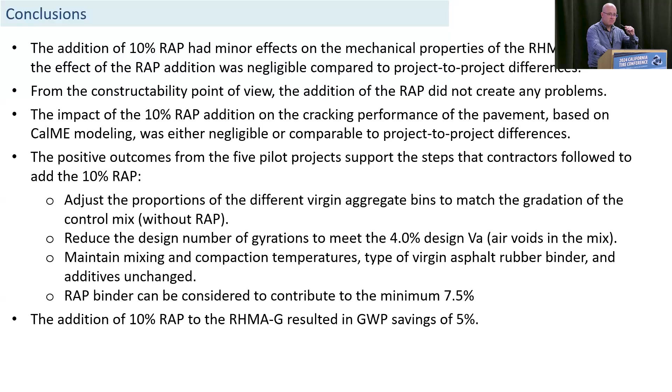Thank you so much, Angel. Very good information, very cool. Questions?

Steve Castle, CRM. Not so much a question, a great presentation, very informative. More of a statement: Caltrans, as you guys have documented, has a mandate to utilize roughly 35% rubber in their overall hot mix tonnage. That's Caltrans' mandate. There's no mandate currently for city or county agencies. Is that something worthwhile pursuing on the city-county side, as we have it in place on the statewide highways side?

Well, that's a hard question. Maybe that's something also for Brandon Miller at CalAPA to address. Yes and no. The no that I would say is because I really believe that just by relying on the mechanical properties of the mix with rubber, we can push the market. That's the reason why I would say no.

I think there's plenty of work to do in terms of training the cities and counties people, pushing them to use the rubber, making sure that the first pilots are highly monitored so that it is a success. Once they are comfortable with that, they will use more. So from my point of view, as a researcher, we also want to bring this to a situation where they can use more rubber, even without a mandate.